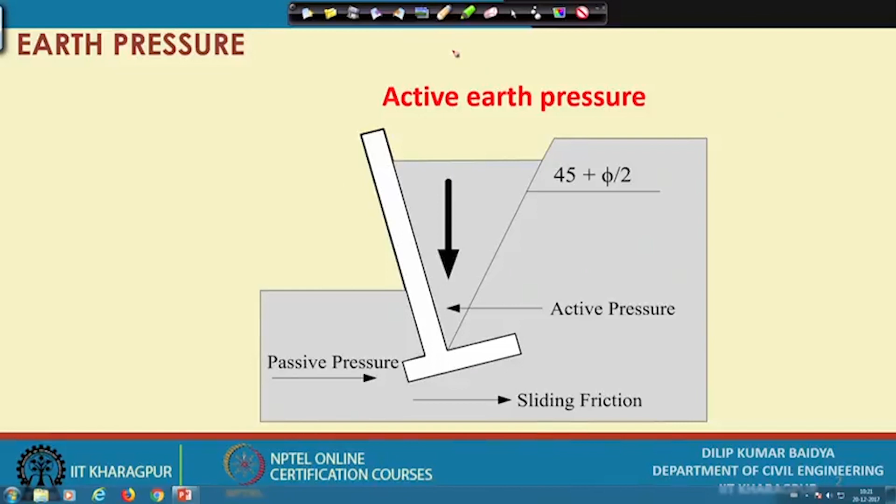I have shown this once already: when there is active earth pressure, the entire soil mass will not move. Because of the wall's weight, the wall will move in this direction, and then how much soil will move - from here, from here, from here - there is actually a limit.

That limit is from here: if you draw a line at 45 degrees plus phi by 2, beyond that line the soil will remain intact, and this soil mass will move along with the movement of the wall. This is the active case. As the movement increases slowly, at a certain point it reaches the minimum value, and beyond that it is considered a failure.

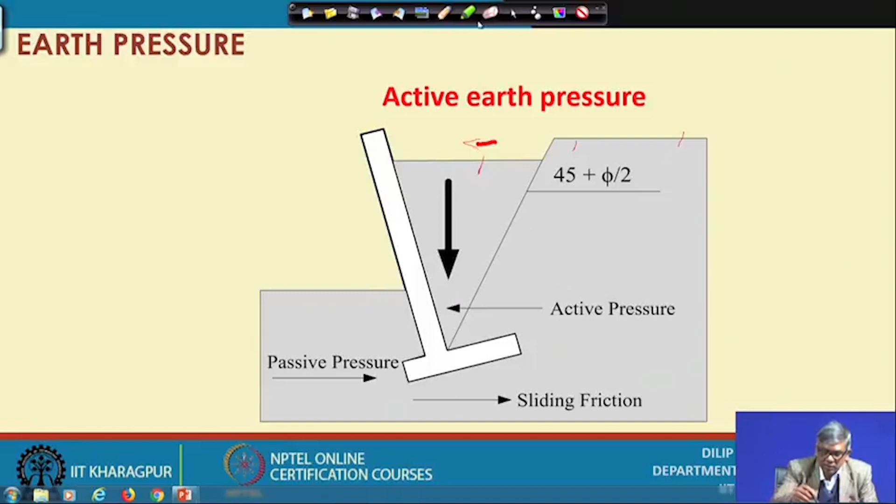That minimum value is called active earth pressure, and if you see this in the Mohr circle, this was either sigma z dash or sigma v dash, or sigma naught dash - whatever you write, all are the same.

So how to find this out? Suppose this is the wall, and I have to find the value at this point. So initially I have to find gamma times h.

Gamma times h - if there is a water table, you have to subtract gamma w into h. By this way you calculate sigma v dash at this point, and then slowly this sigma v dash will reduce, and it will finally become sigma h, which in general will be smaller. How do we find that out?

Initially at rest condition, it is multiplied by k naught, but slowly because of this movement this value reduces. As I mentioned before, this value keeps coming down - this was sigma v, this was sigma h initially, then it comes here, then here, then here, like that.

For the time being, I will just mention that this sigma h, or lateral pressure on the wall, will be k a times sigma v. Whatever sigma v was there, if you multiply by k a, you get the lateral stress, which is the active earth pressure at this point, and this is the failure plane.

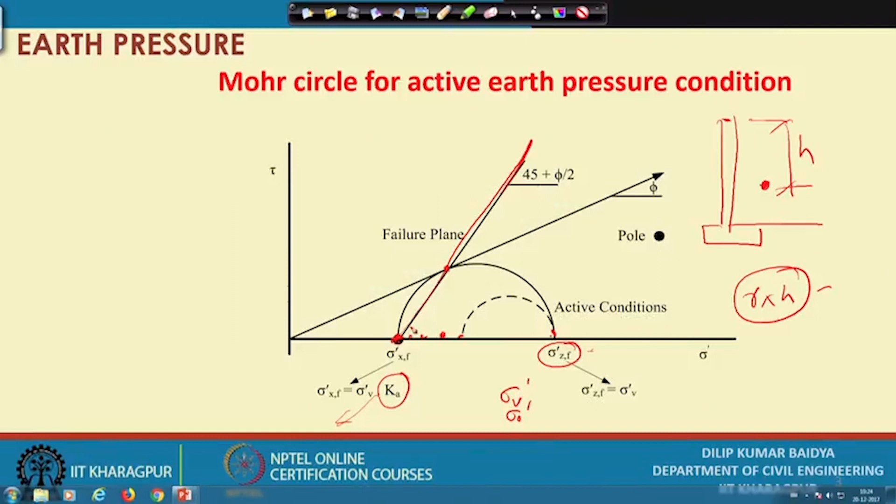Similarly, for the passive case, suppose this is the wall, and by some mechanism we could push the wall in this direction. Again, as in the previous case, you can see whether the entire zone of soil will be affected or only a particular zone will be affected. Soil within this zone only will be affected, and this zone is to be determined.

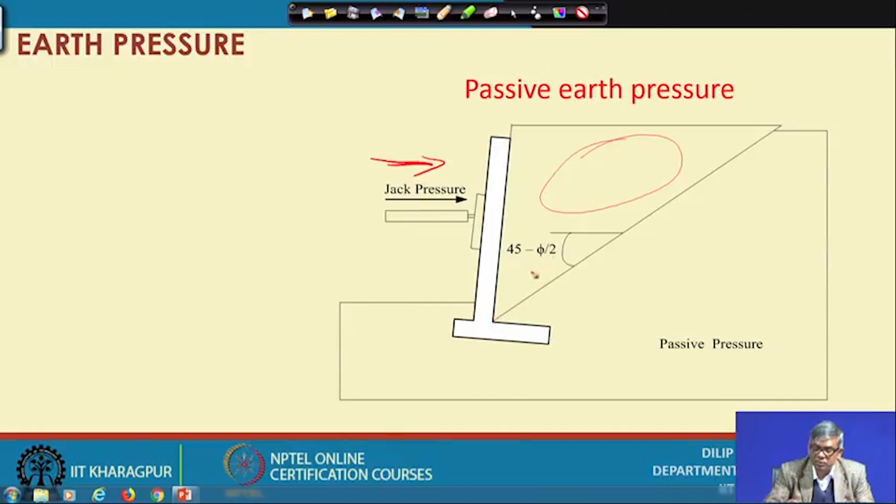You can draw a line from here at 45 degrees minus phi by 2 with the horizontal, completing this zone. This is actually the passive zone, where the soil will only move along with the wall. Because of this, the pressure on the wall will be increasing slowly, and at some time it will reach its maximum.

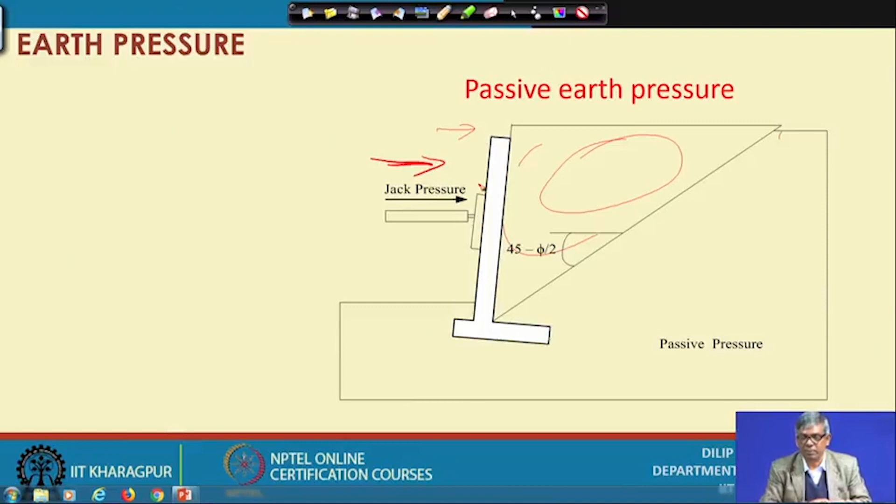If you apply further more than that, then the wall may fail or collapse. So, at the point where it reaches the maximum value, that is actually called the passive pressure. If I see the corresponding Mohr circle for this, you can see here.

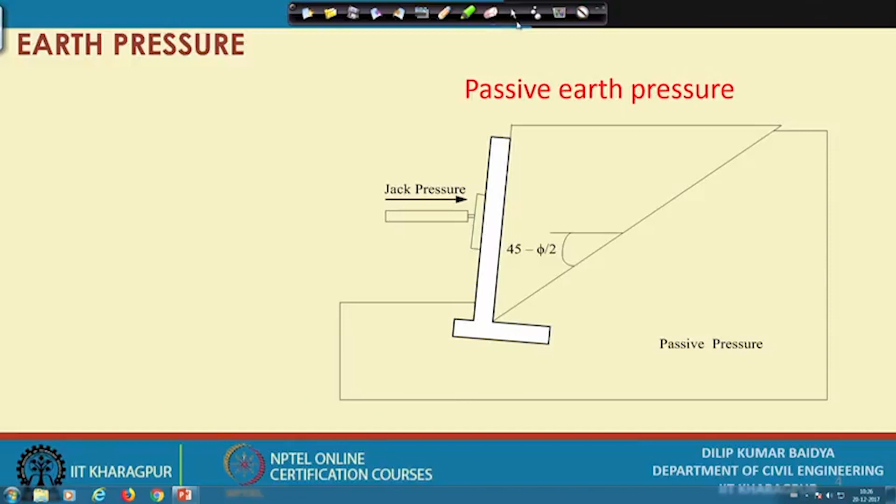And geometrically again you can find out that this angle is 45 degrees minus phi by 2. So this is the thing to be known - at rest condition, active condition or passive condition, how it is with respect to wall movement, and again with respect to the Mohr circle how it is.

The Mohr circle for the at-rest condition will be much below the envelope, whereas in the active case, the Mohr circle will be just tangent to the envelope. Originally whatever vertical stress was there, horizontal stress was there, that will be reduced, and finally it will reduce to a minimum value, and that is equal to active pressure.

That means the circle originally at the at-rest condition, whatever position it had, will move towards the left. In passive condition, the wall will be moving towards the backfill, and with this, pressure on the wall will be increasing, so that horizontal or lateral pressure will become larger than the vertical pressure - lateral pressure will become the major principal stress.

If you draw the final Mohr circle corresponding to the passive case, that again will be tangential to the envelope, and from the major principal point to the tangent point on the envelope of the circle, if you connect, that line gives you the failure plane. That failure plane inclined to the horizontal is 45 degrees minus phi by 2. So that is the thing to remember.

So when I did for the active case, that was 45 degrees plus phi by 2, whereas now for the passive case it is 45 degrees minus phi by 2. These two things are very important to be remembered, and very frequently required in solving problems, or sometimes in short answer type questions.

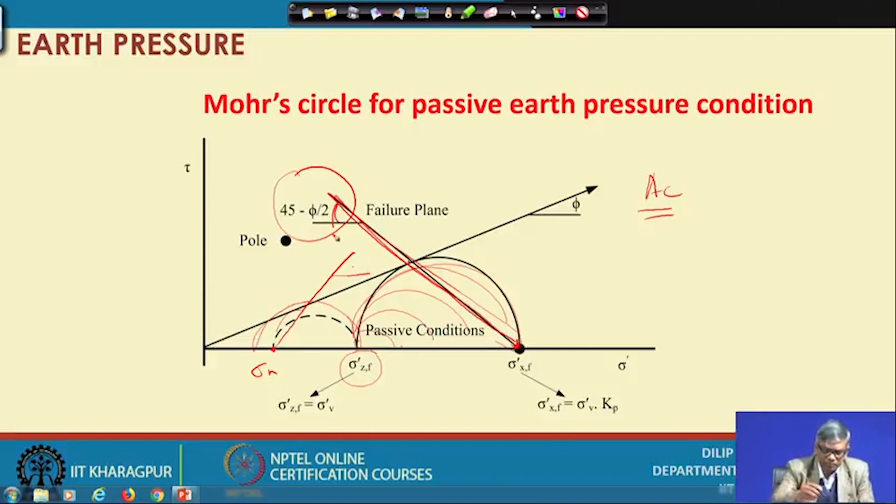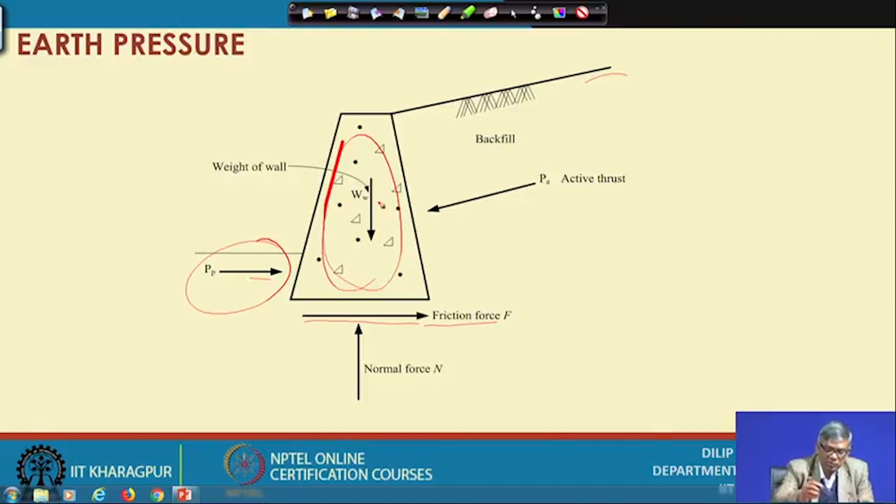So if it slides, then friction will develop between the soil and the base of the wall - that is the frictional force to be shown. How much frictional force there will be can be calculated, and we will discuss that later. Obviously there will also be a reacting force - the entire thing will have a vertical reaction. So all forces are there. Once you know these forces and do some analysis, one can find out what is active, what is passive, and all. I will do that one by one.

Suppose you can see I will consider the wall moving this way. We can make a few assumptions: the frictional force between the backfill and retaining wall is assumed to be negligible.

This is the backfill and retaining wall. The frictional force here is ignored.

The wall is straight and the surface of the backfill is horizontal. That means the wall can be like this, and the backfill can be like this. So this is not the case we are considering—we are considering the wall like this, so the backfill is like this.

The backfill is homogeneous granular material. That means here we have considered granular material. If it is granular material, only phi will be there, but if it is not granular soil, then it will have C also. If C is there, the calculation will be different. We will see that later; right now we consider only granular, homogeneous material.

The failure surface is assumed to be plane, meaning this surface is taken as a plane. It is generally little curved in research, but for approximate calculation we take it as straight.

Then I got the force diagram, the force polygon, for a particular beta. Now I can optimize for beta to find out at what value of beta the active force or active thrust becomes minimum. That is actually what we want to find.

So initially we have taken a beta value, any value. If it is beta, then this is H cot beta, this is W, this is PA, and these are all shown, and based on this we get the force polygon.

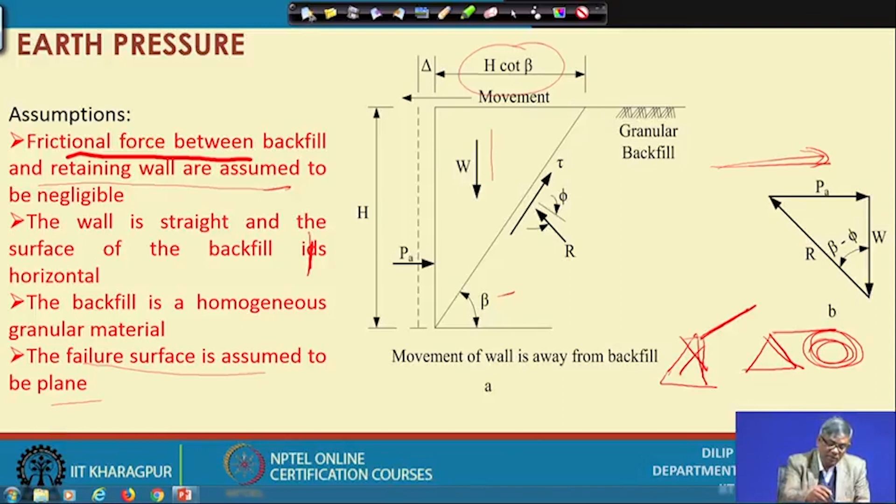If you have this force polygon, then by doing this, the earth pressure PA will be W tan(beta minus phi). So from the polygon, we can find PA in terms of W, beta, and phi.

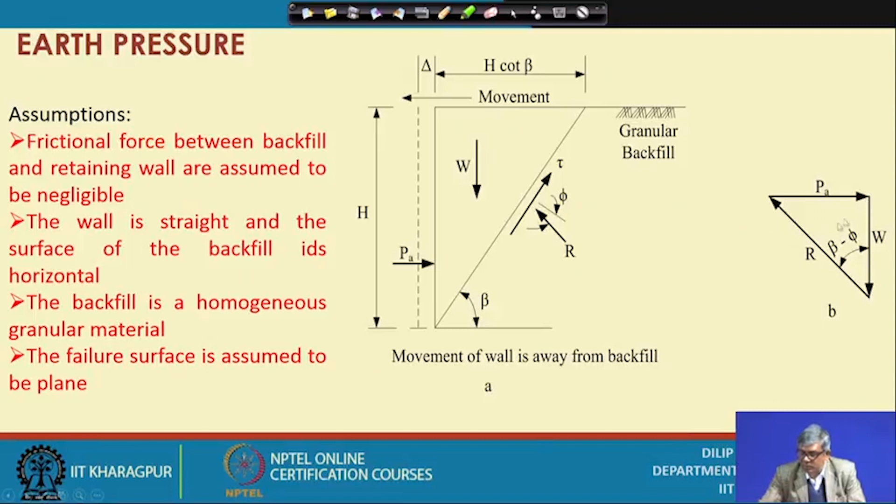So that is the thing done. You can see PA equals W tan(beta minus phi), and again W we can calculate from geometry.

This is half gamma H, the volume of soil multiplied by gamma. So this soil volume is H squared into some function of beta and H, giving half H squared cot beta into gamma, which becomes the weight. If I substitute this weight here, then PA becomes this expression, having beta and phi.

Now I can differentiate this expression for PA with respect to beta and set it to 0, to get the value of beta for the minimum. If you do that—del PA del beta—differentiate and set to 0, then simplify. It is not so easy, of course.

We have to do so many substitutions, this and that, and finally you get the result: 2 beta minus phi equals 90 degrees. By differentiating and setting to 0, we are getting a critical angle. Initially we had taken any value of beta; now the beta for which it gives the minimum value, that I am defining as beta CR.

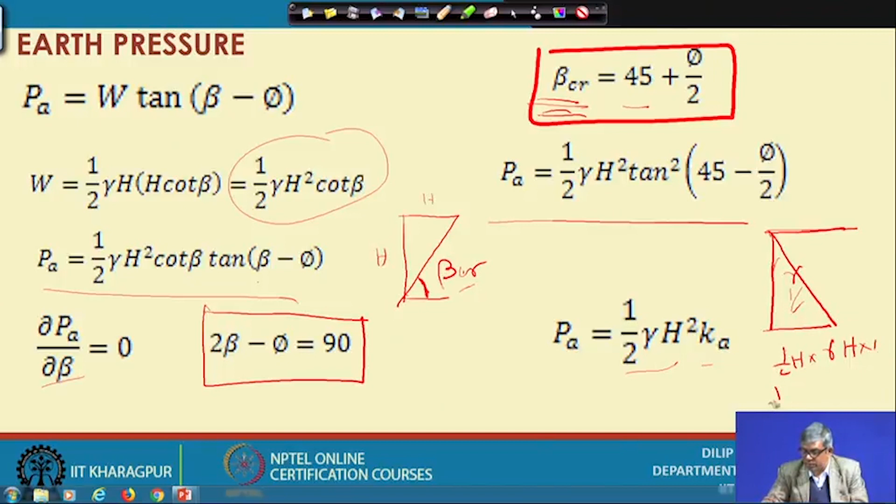So if there is a wall and a backfill, and the soil has density gamma, then the soil pressure diagram with depth will be like this. The area of this diagram will be half into H into gamma H, and if you take unit width, that becomes the pressure thrust, half gamma H square, if you do not do anything else.

So half gamma H square is there, and additionally we are getting tan square 45 degrees minus phi by 2 as an additional term. So that we denote as KA, the active earth pressure coefficient. So KA will be equal to tan square 45 degrees minus phi by 2, or it is 1 minus sin phi by 1 plus sin phi.

So this is the thing you have to remember, it will always be required. The active earth pressure coefficient, either in tan form, tan square 45 degree minus phi by 2, or in sin form, 1 minus sin phi by 1 plus sin phi. Either way one can remember it.

So we got at this level what is KA and what is PA. That means if there is a wall, we can find the thrust because of the soil pressure, and how to find KA from this. If you know the phi of the soil, then we can find KA, and from there we can find the active thrust.

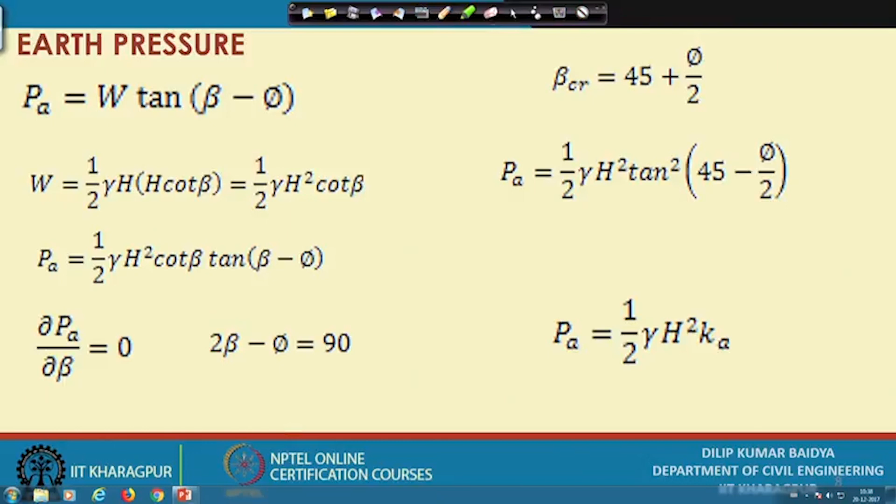Similarly, you can see if the wall is moving towards the backfill, say the wall was here, and then moving in this direction.

So pressure will be PP, vertical pressure is acting here, PP is acting here, and then in this plane there is shear acting, then resultant R is acting, and the angle is known from mechanics. We can find this, and then we can find the force polygon. Whatever force is acting here, taking that we can draw this force polygon.

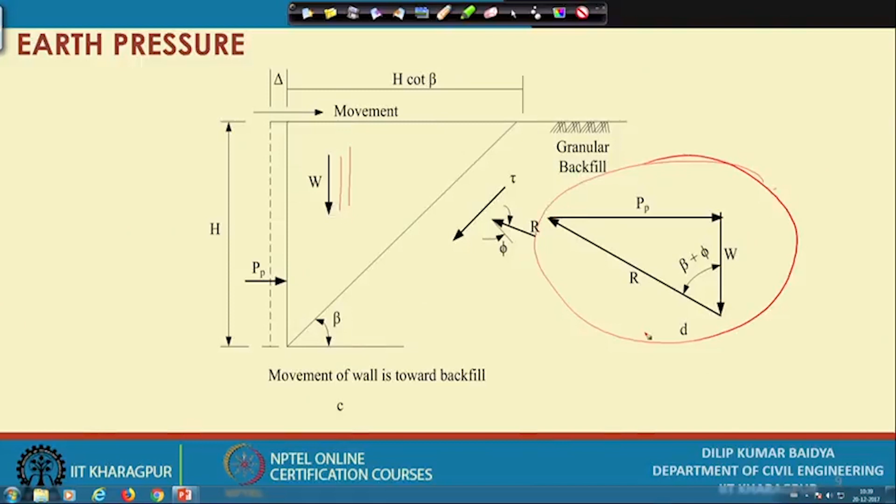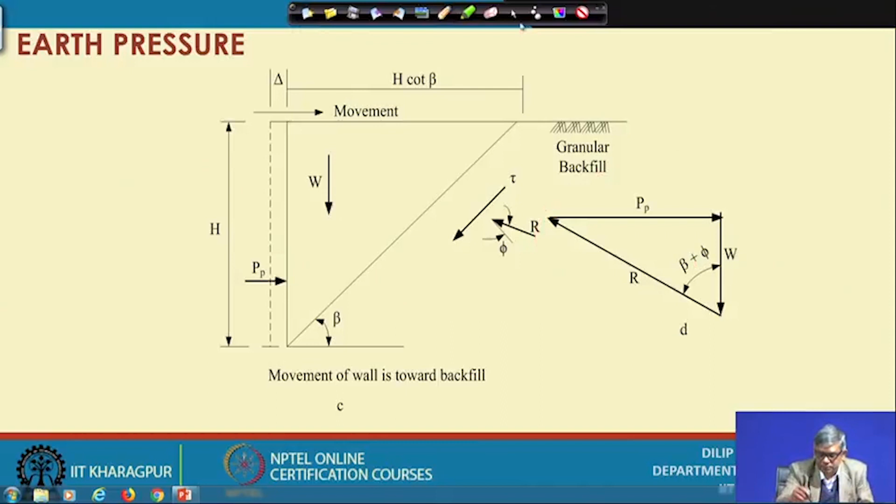Now from this force polygon you can also find PP in terms of W and beta plus phi. So similarly as we have done for the last one, you can see PP equals W tan of beta plus phi, and W again is half gamma H square cot beta.

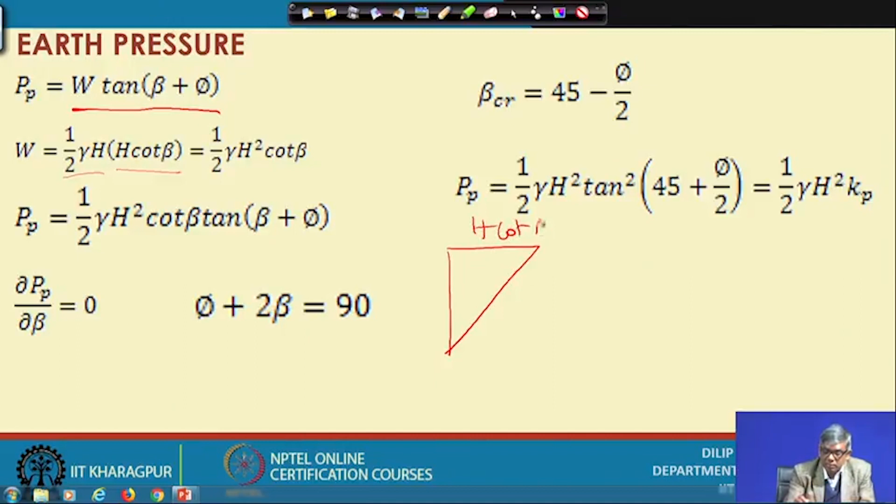So that is also from geometry. This is H cot beta and this is H. So obviously this angle is taken as beta, like in the active case we know that finally beta critical is 45 degree plus phi by 2, but initially what did we take?

We have taken it as beta, and for a particular value of beta I consider the wedge, and then I consider the force equilibrium, that is the polygon we have done. Then I find the expression for passive pressure, and then I can calculate W, substitute it, and you get PP. This is the expression for PP, which is half gamma H square cot beta tan beta plus phi.

So beta and phi. Beta generally is not known, is it? Phi is known for the soil, but beta is unknown. So that is why we need to find the value of beta.

So similar to what we did in the previous case, del PP by del beta, meaning if you differentiate this with respect to beta and set it to 0, that means we are optimizing it. After several substitutions, modifications and simplifications, eliminating terms that cannot be zero, etc., finally you get a relationship between phi and beta, like we got for the active case, here also you get a relationship between phi and beta like this.

So from this, whatever beta I get can be considered as beta critical, and that beta critical will be 45 degrees minus phi by 2. As I showed at the beginning, when the wall moves towards the backfill, the failure plane makes an angle of 45 degrees minus phi by 2, which we had just mentioned as a fact. Now, based on this calculation, we have derived that this angle is indeed 45 degrees minus phi by 2. Now, substituting this beta value and simplifying, we get PP equal to half gamma.

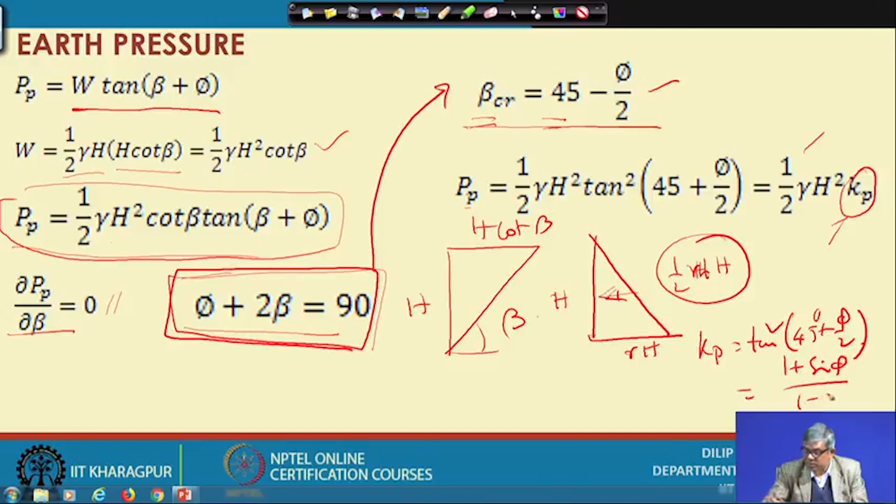So if I draw the pressure diagram, with H as the height, this is gamma H. So half gamma H into H would be the thrust if nothing else is done, but this is multiplied by a factor called Kp. So Kp equals tan square of 45 degrees plus phi by 2, or equivalently 1 plus sin phi divided by 1 minus sin phi. So if you know the phi value, you can find Kp, and after knowing Kp and half gamma H square, you can find the active or passive thrust.

Now you can see the relationship between Ka and Kp: Ka equals 1 by Kp. So if the soil has phi equal to 30 degrees, then Ka equals 1 by 3 and Kp will be 3. If phi of the soil is 30 degrees, and I put Ka equal to 1 minus sin phi by 1 plus sin phi, this gives Ka equal to 1 by 3, or 0.333, and if I find Kp, that becomes 3, which is the inverse. So from the coefficients of earth pressure, active and passive, you can see that Kp is a very large value.

So earth pressure at passive condition will be very high. So this is one way we derived it geometrically using the force polygon, introducing Ka and Kp as terms. But based on the Mohr circle, applying Rankine's theory, we can also get this same result.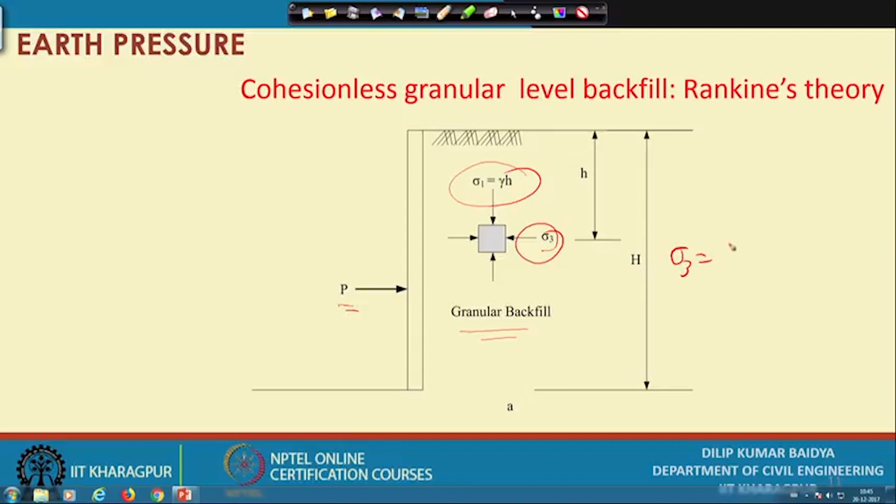Suppose we are considering a wall here, with P acting here, and granular backfill of height H. Sigma 1 is gamma H, and sigma 3 depends on whether it is active or passive condition. So sigma 3 will be either Ka sigma 1 or Kp sigma 1, one or the other. I will show you both happening in the same diagram.

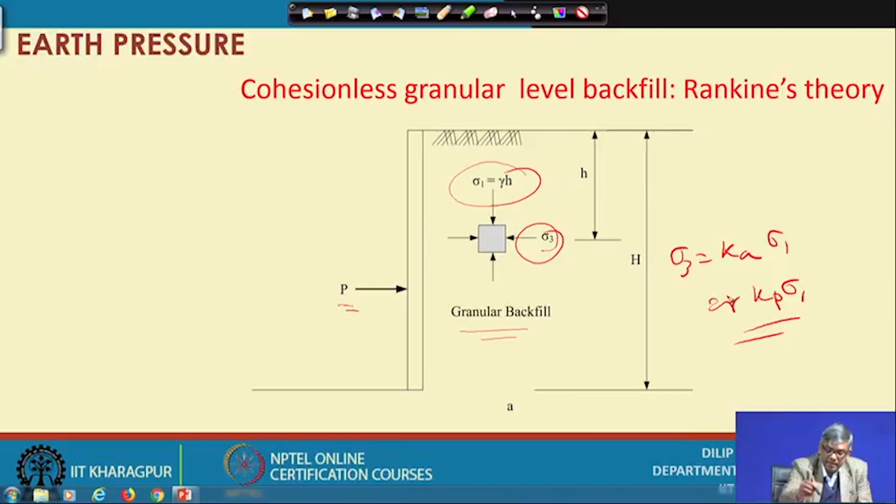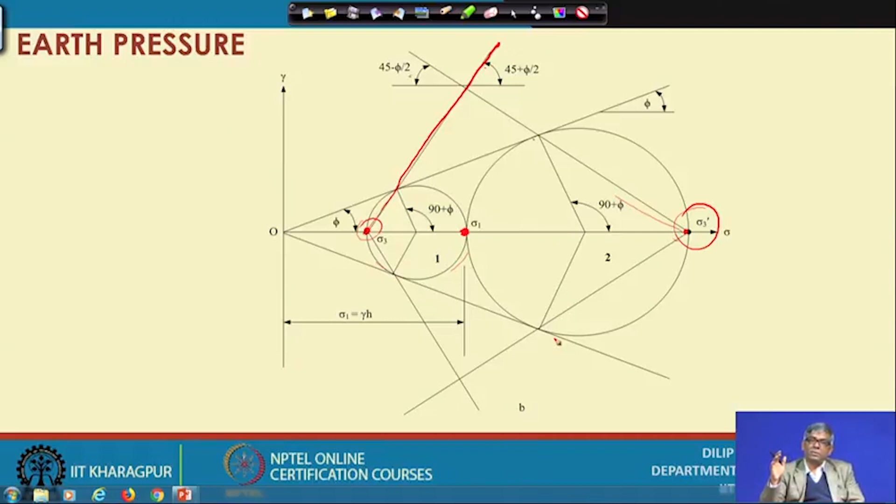So I will now discuss Rankine's theory, and based on Rankine's theory, how to find the earth pressure both for granular backfill with level ground surface and granular backfill with inclined surface. Then, if there is a c-phi soil, how to find that as well. We will proceed through all these one by one. Right now I will stop here, and continue in the next lecture. Thank you.